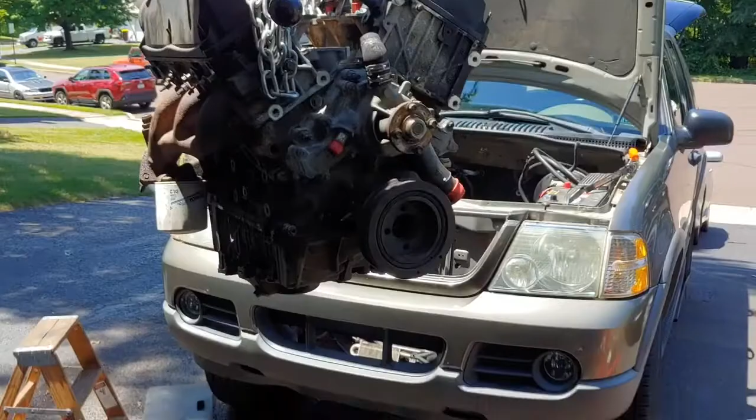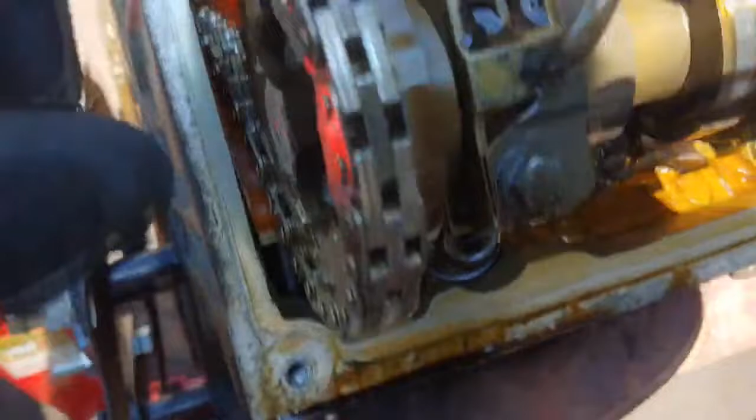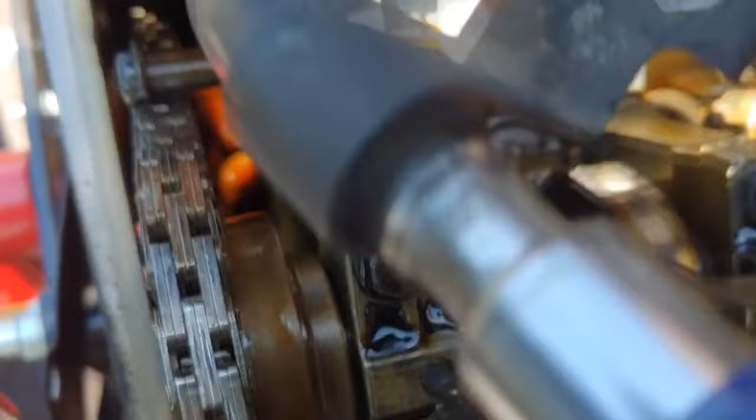Man, what a pain in the butt. Wasn't too bad getting it out, and this is the reason why I pulled the motor. I'll get that off in a second, but if you notice, the timing chain guide is broken. It's riding right on that. Chain's riding right on that, if you can see that. That's the timing chain guide there.

Now, this thing still runs good. Still runs pretty good. The only reason that I knew that was bad was, it wasn't even that noisy, but this valve cover was leaking so bad onto the exhaust that it was smoking. I think I bought this truck like 2 years ago. So it was leaking bad enough to where I was like, I don't know if I should change

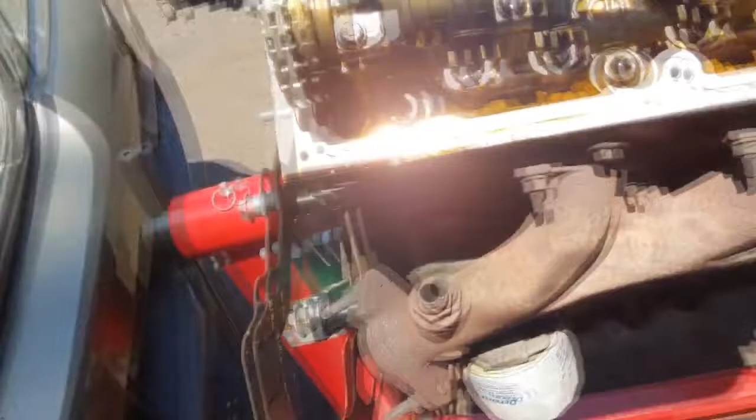the gasket or not. I mean, I only paid $350, I think, for this truck. I was like, I'm not gonna change it. But then it was just annoying, the smoke, and it was leaking on the floor pretty bad. So I broke down and did the gasket. No big deal. They're easy to do, the gaskets, take the intake off. And when I did that, I noticed that.

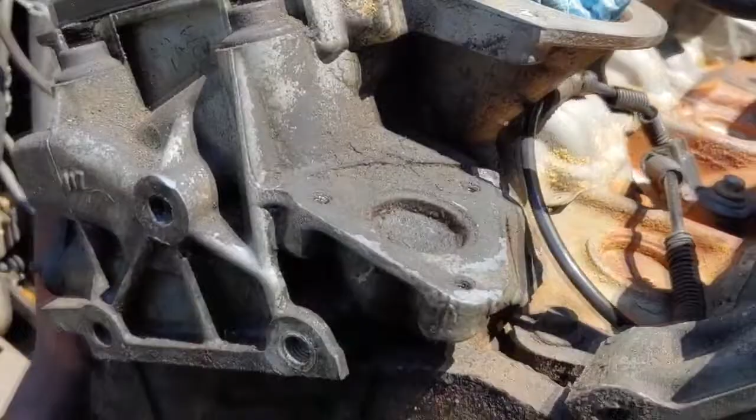So ever since then, I think I put like 10,000 miles on this since I noticed that the chain was bad. But every time I drove it, I was barely pressing the gas pedal because I didn't want it to break on me. But now I have a little time to do it. The front one, I don't even know if I changed that gasket, to tell you the truth. I think I only did the one side because this side was just pissing out. But yeah, oh well. Gotta do it.

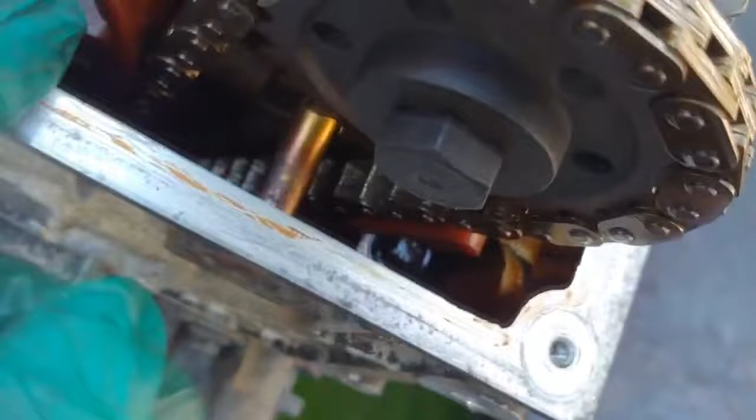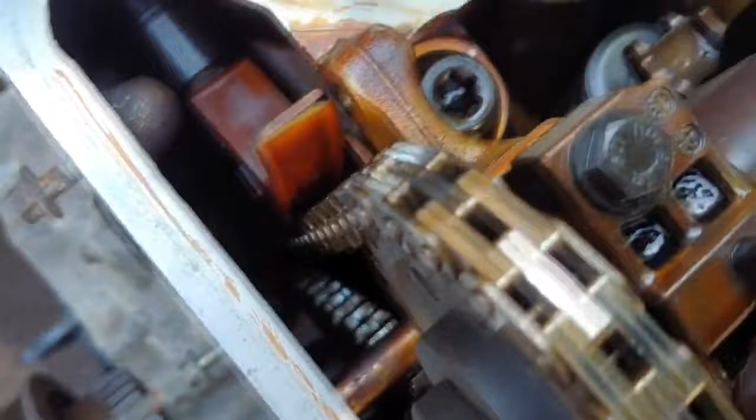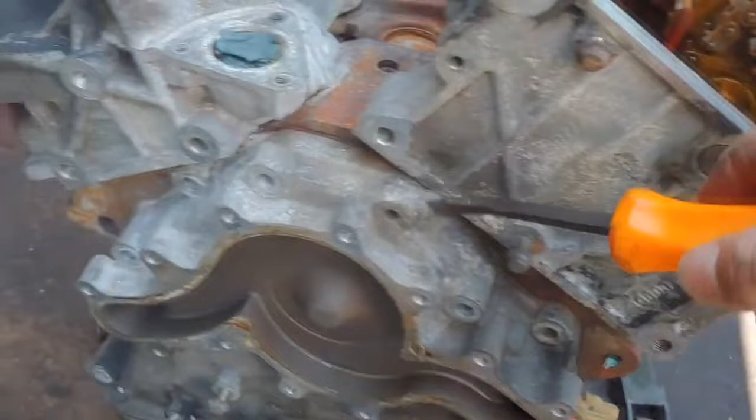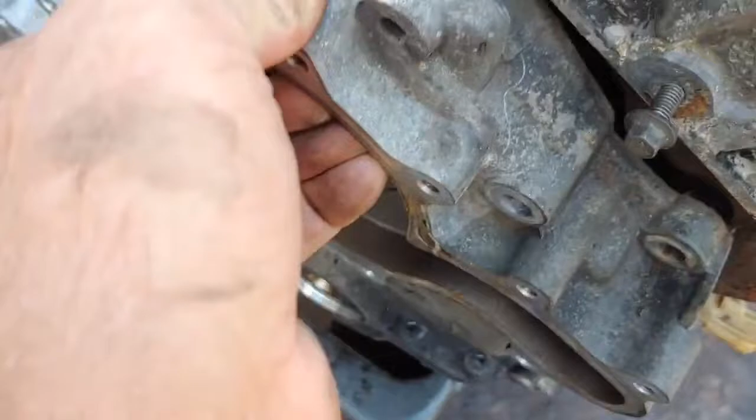Got the front cover ready to come off. I don't know if I'm gonna be able to do this one-handed, but we'll see. Give it a little tweak. Maybe I'll use my knee to hold it on. Give me a spot. Just need a little spot. Oh, there it goes. A little wiggle. There you go. Use the old hip. Alright, got it off. Stick this up here for now.

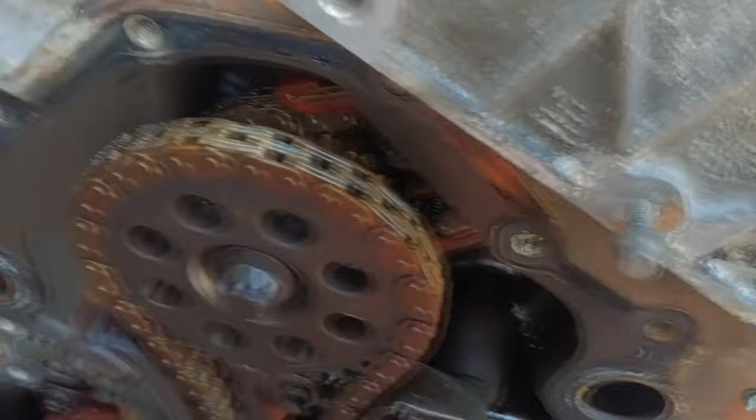Surprised. It's a little loose, but is it broken? I don't know. That's the balance shaft. So far, I think I'm gonna take the pan off next, flip it upside down, take the pan off before I do any of this stuff. Ooh, I can hear stuff falling on there. Yep. Cool. A whole bunch up in here. Jammed in there, huh?

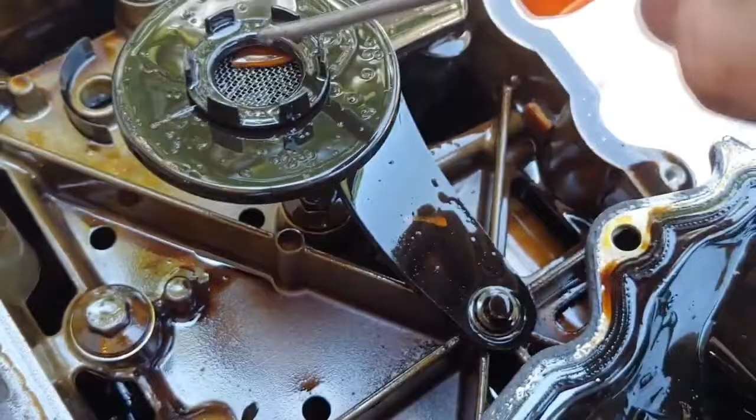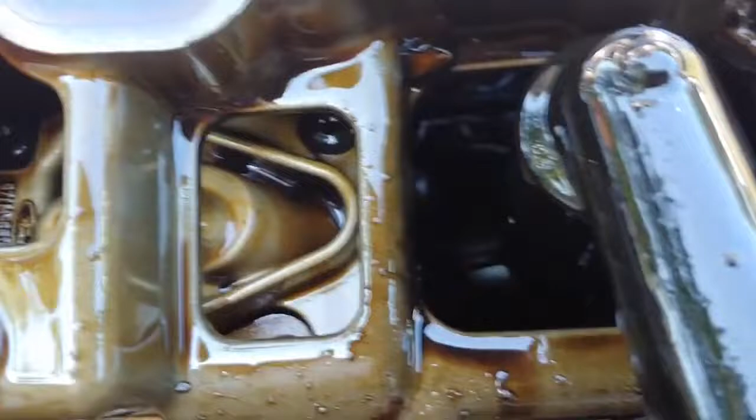I'll fish this out when I take that off and shake it out. I still got to take this part of the pan off, the upper pan. I don't see anything. Little one there. I don't really see too much going on here. Once I get it all apart, it'll get more cleaned out. Okay.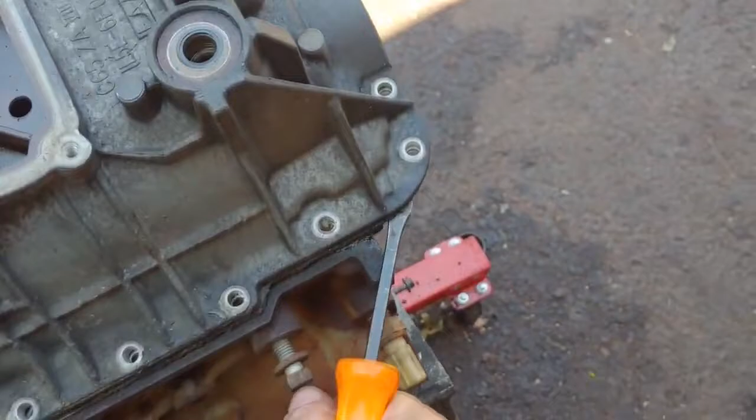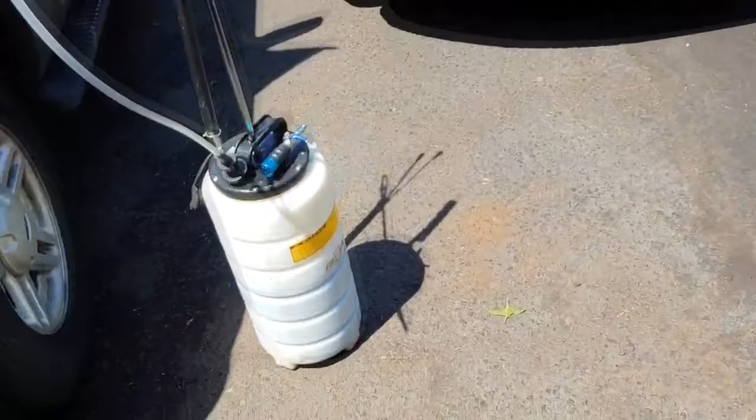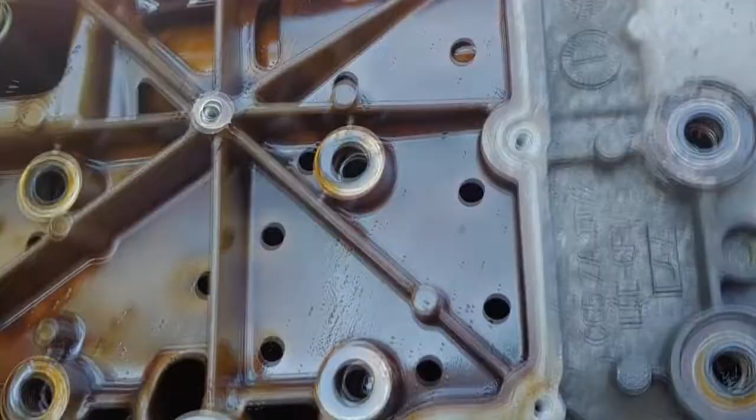Need to find a good spot to pry. Here you go. Some more timing chain guide. It came out the front. I don't know if it might be that top piece of that thing there. Come on. Okay.

I think I got all the pieces out, really. Yep, now there's a piece in there, a couple little pieces. Piece here. Got everything out. Had these two pieces in there, I'm assuming part of the tensioner or whatever. But you can see right there, it hit something.

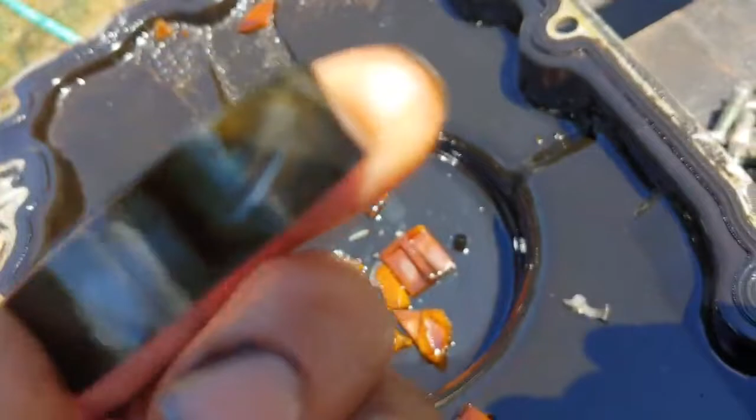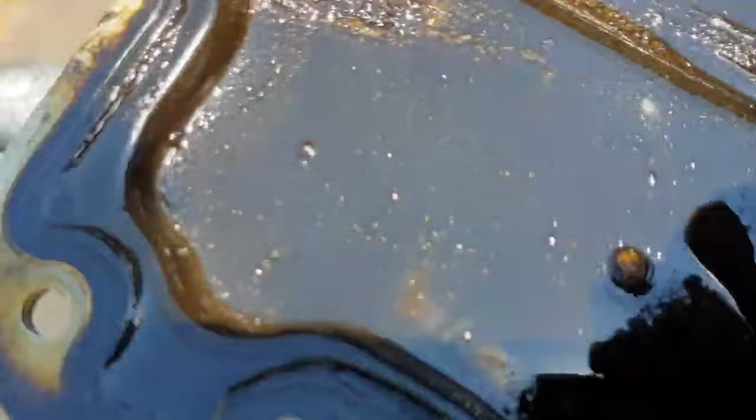So it's plastic. A whole bunch of crap. And some of that good stuff. So yeah, good stuff, eh? Good stuff.

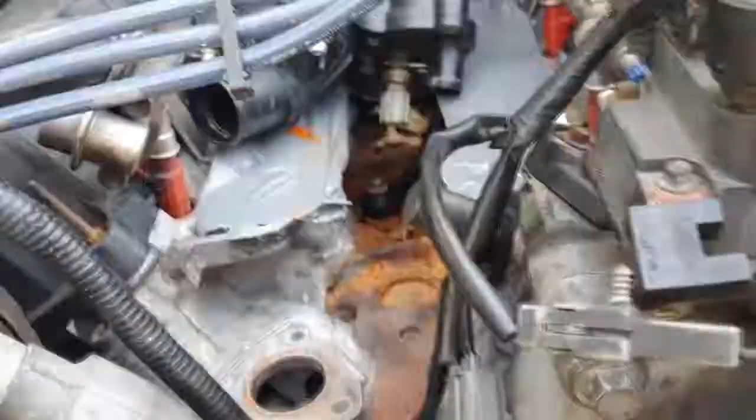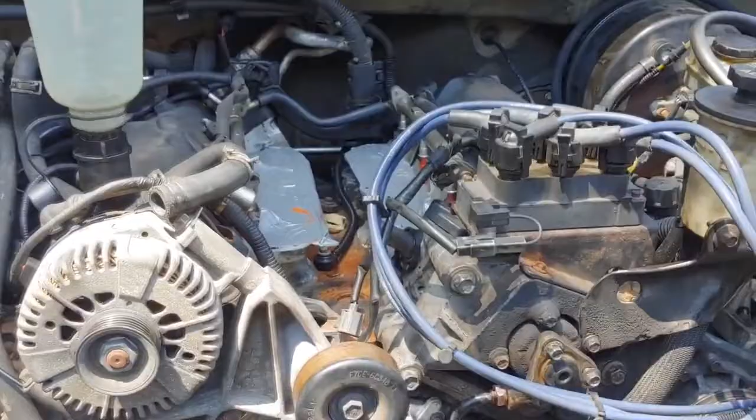This is the point I find out how good those chains are. Last night I was bored and I looked up the reviews of the chain kit I bought. Whew, not very good. I should have looked at them before I bought the chain set and put them in the car rather than after. Shouldn't have looked at them at all.

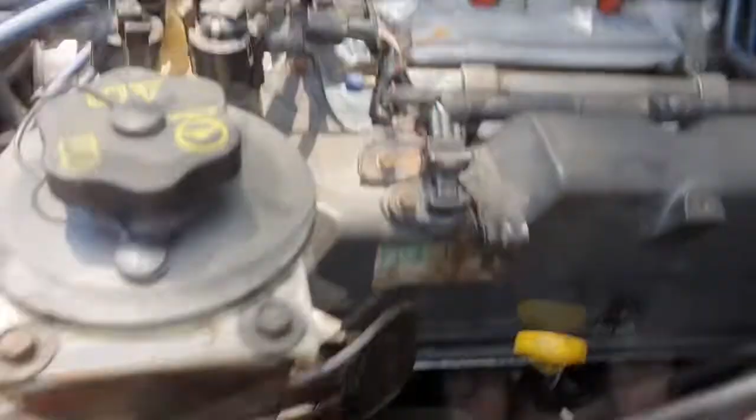I have the fuse out for the injector. There's the fuse right there. I got the coils disconnected. Obviously the intake's off. I'm going to crank this up, try to get some oil pressure. I'm going to do this twice. I'm going to do this once now, and then once when I'm actually ready to start it. I'm going to crank it. I got the plugs out too.

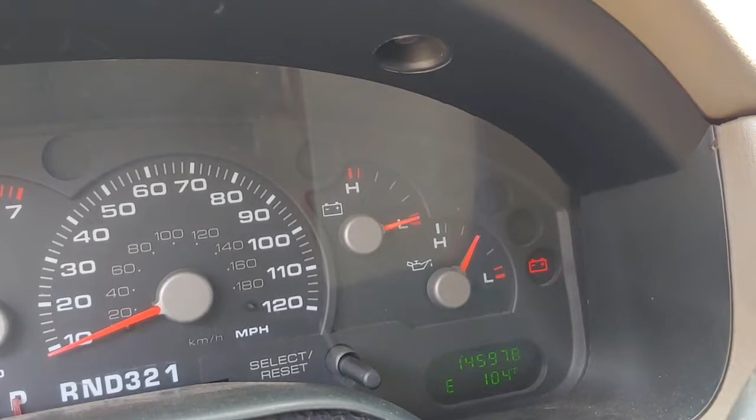Come on, guy. There it is. So I got oil pressure, and my Walmart battery's dying. So I'm just going to keep cranking for a little bit. Alright. I don't know what it sounds like with compression in it. I'm going to put the plugs in now. I'm going to charge the battery up, and I'm going to do the same thing.

Fuse is still out. Coil's still disconnected. Intake's on. Obviously I got no coolant or nothing on there. Plugs are in. I'm going to do the same thing. Get pressure up, and then I'm going to try to start it. I want to get pressure up first, and then I'm going to hear what it sounds like with compression. Get my gauge sweep.

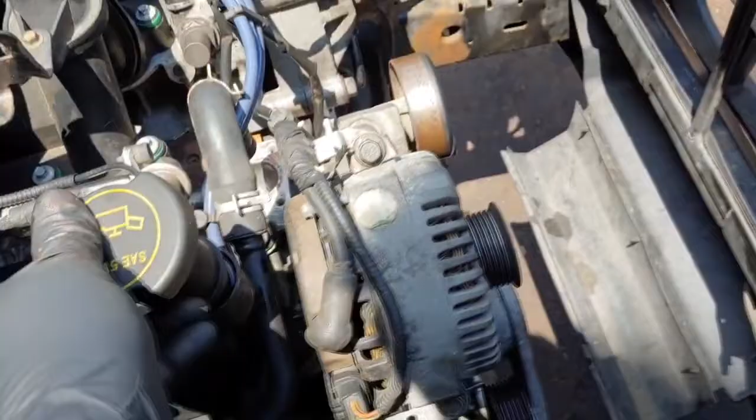Doesn't sound great. Guess we'll find out. Whoop. It's running. Pretty noisy. Just the lifters need to pump up a little.

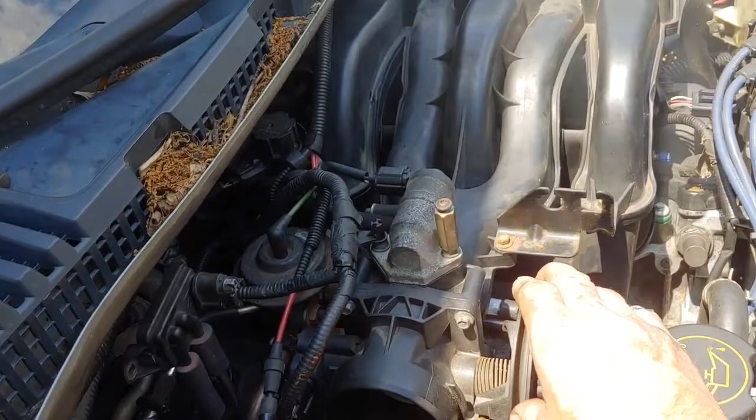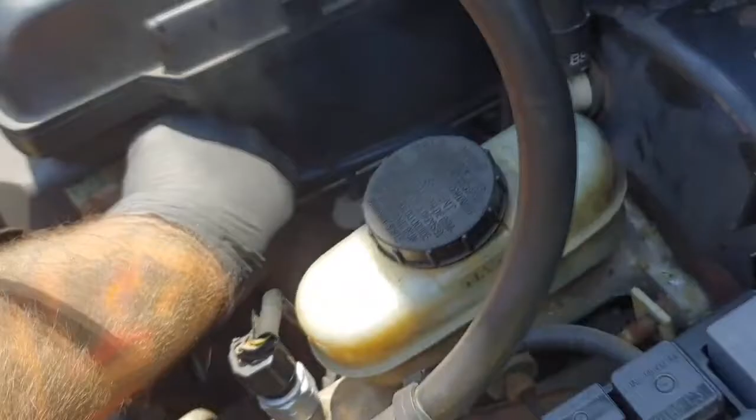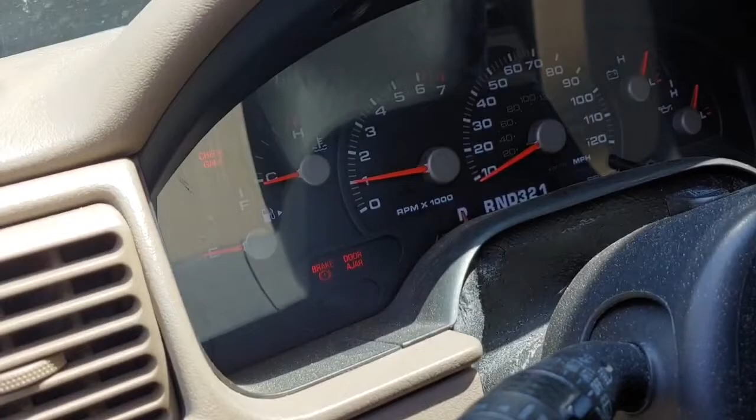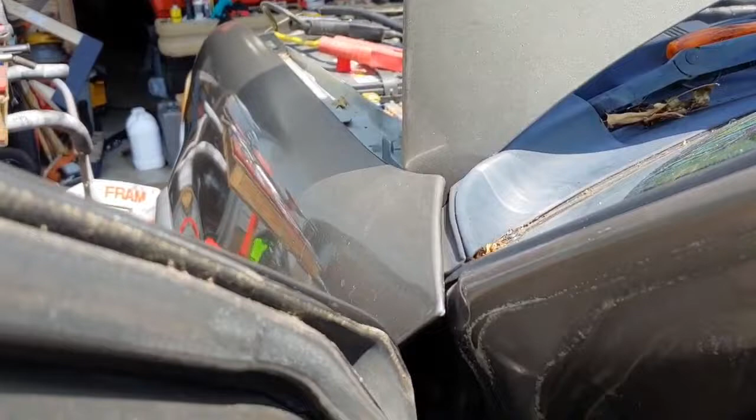Yeah. This sounds really bad. That doesn't sound good at all, huh? Oh boy. Now I am probably running out of gas, but at least it sounds a little better now. But I don't know what the hell all that noise was. Well, it's a new start.

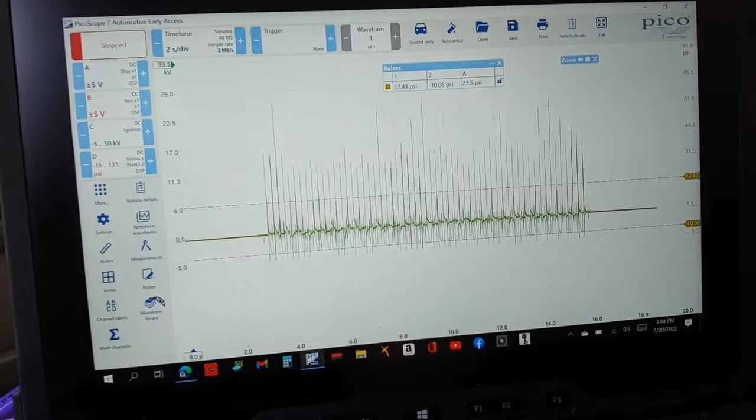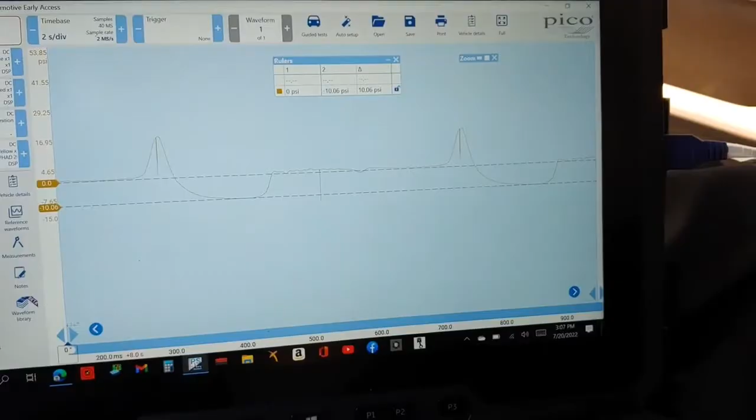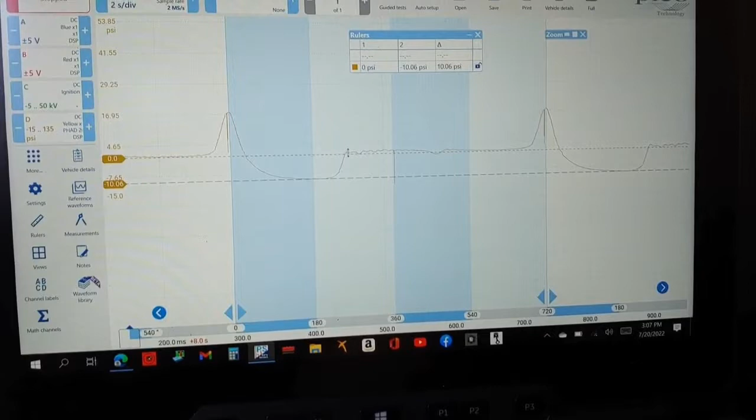Right here, if I look at this, this is ignition and in cylinder. I have 17 psi of compression, and this is my in cylinder, which, you know, huge deep pocket. I hope it's just a follower or something. A rocker fell off or whatever. There we go, right about there. So 180. So actually, according to this, it's not in time. 360. Yeah. Wonderful.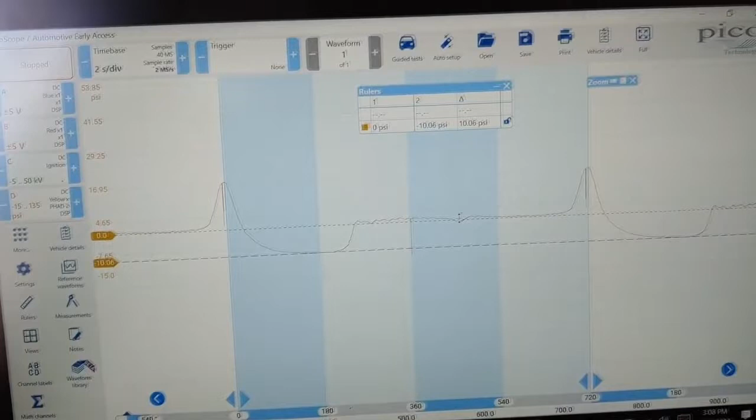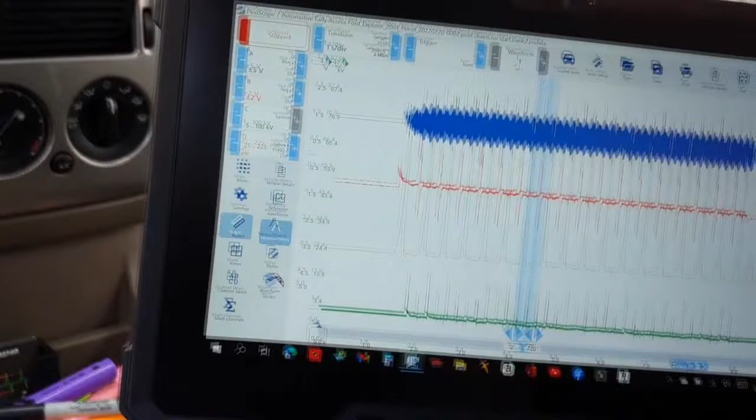This is bank 2. You can immediately see I have compression, you know, close to 150. So this looks normal because it's cranking. You're not really going to see valve events. But you can see right here. Let me get rid of this. I don't need this.

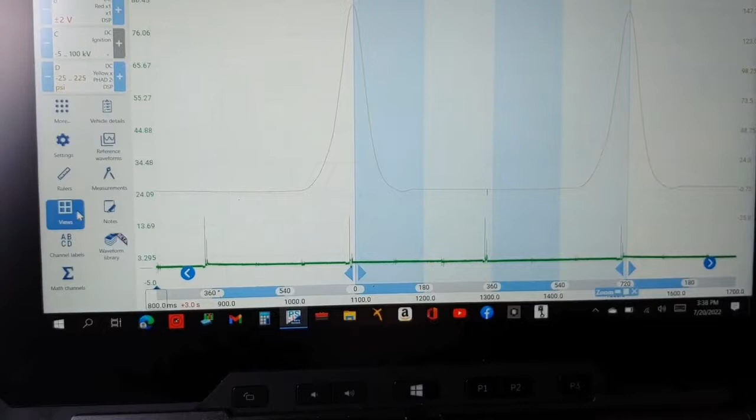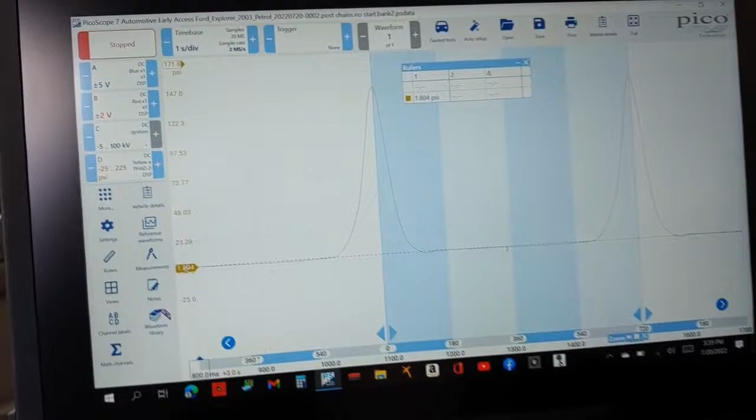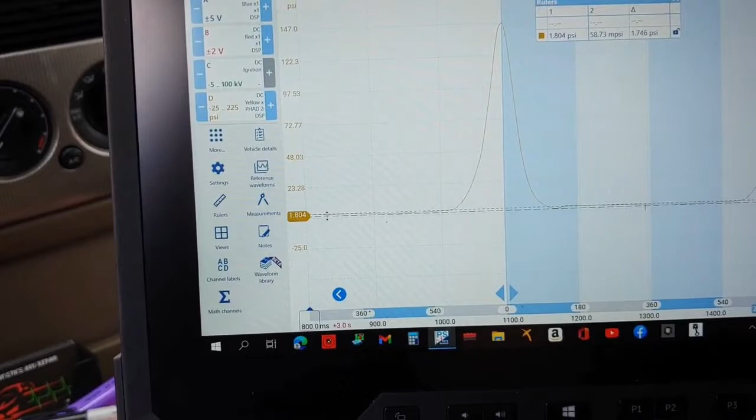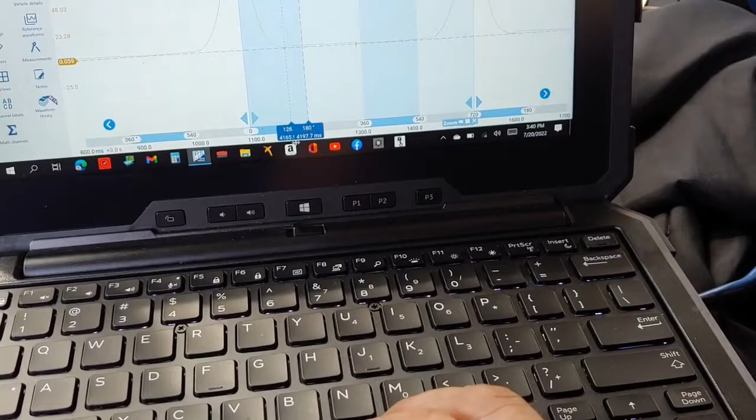Peak compression 145.9. Let's take this down to 0. Actually call that 0. Alright, it's 1.8. Looks like a little bit higher there. That's about 1.7 psi. Let's just make this 180. That's 180. I'll take this one, and it's probably right about there, about 58 degrees.

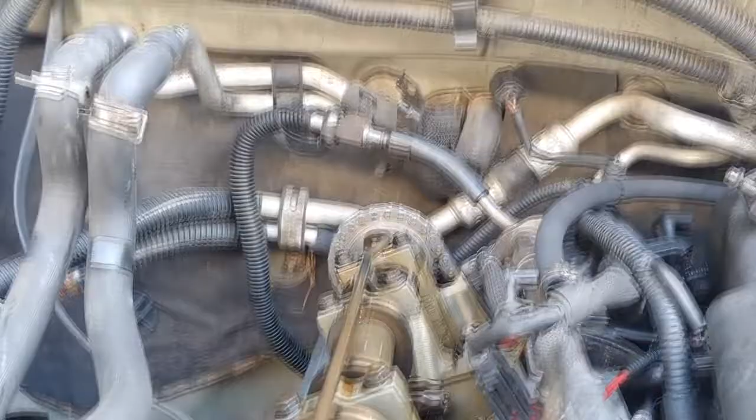The thing I don't understand is it ran good for a second. I know I torqued that down. I know I torqued it down. It's reverse thread, so no idea. It ran good for a second and then it didn't. I mean, it was noisy, but it ran, no misfires, nothing. Now it doesn't run at all. There's no compression on that side.

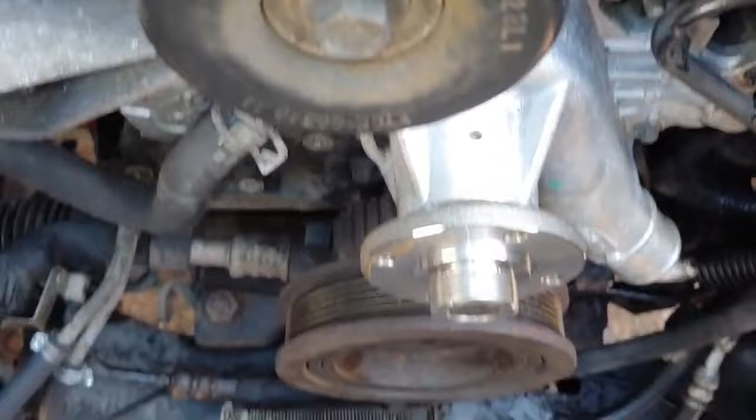When I put the tool in here, that arm, see that arm's going straight down? Right here. It's hard to film this. Basically here. Right? That is supposed to turn this counterclockwise, and it's supposed to butt up against the block right here. I'm like 90 degrees out. I'm so tempted to loosen that up and then turn this 90 degrees.

Well, the concept worked. So now you can see the fat notch. Where that goes is up on top right here. So hopefully this works. Otherwise the engine's got to come out and I got to buy Motorcraft shit. This is probably going to be ugly.

I have one plug out, but one's quiet. I'm gonna put that other plug in. Still missing. I don't know, probably because it's fouled out.